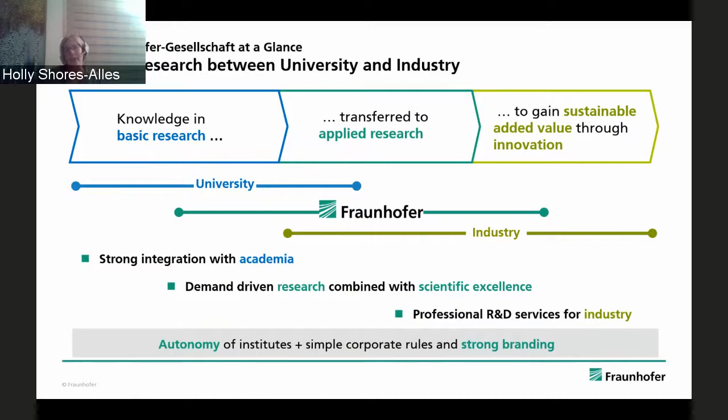Fraunhofer has a very unique role in this capacity. We have one hand in basic research and the other hand with industry, so we are the translator. We take what comes out of universities in their basic research, figure out how it can be turned into a marketable product or service, and find the appropriate customers who can commercialize this.

As a result, it's crucial for all of our institutes to have a very strong link to academia. For this reason, Fraunhofer has a mandatory model that the heads of the 76 Fraunhofer institutes are also university professors, or that they have a chair at a university. This serves both the Fraunhofer Institute and the university.

If we look at it from the Fraunhofer Institute director's point of view, they benefit from this because this association gives them access to basic research. They have access to all of the students and can recruit new scientists from the universities, as well as interns and undergrads, and they have opportunities for their employees to gain scientific qualifications.

Now, looking at it from the same person who is a chair of a university, their affiliation with Fraunhofer opens the door for them to have access to customers and industry-oriented projects. They can put this also into their curriculum, and they have access to all of the facilities that a Fraunhofer Institute has.

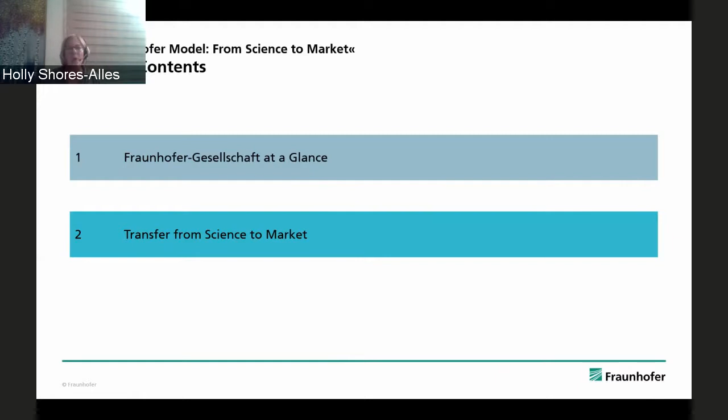All right, now I'd like to say a few words about how we transfer some of our work into the market. First of all, Fraunhofer has a number of impact goals. At the moment, we have 5 identified main goals. Number 1 is to have a secure and resilient society, meaning we want to help all aspects of society identify dangers and risks and be prepared for them. Affordable healthcare is also a focus, along with circular economy, a digitized value chain, and clean energy.

Now, based on these goals, we cluster the research that is done. We have 76 institutes, each very autonomous, each with their own unique R&D profile or portfolio, but they are clustered into the following research fields: bioeconomy, next generation computing, digital healthcare, AI, hydrogen, resource efficiency and climate technologies, and of course, quantum.

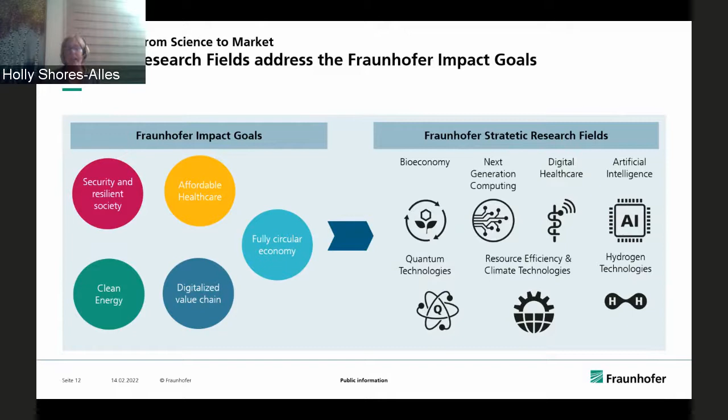Fraunhofer has identified certain ways we look at our own efficiency in terms of whether we're translating what we do into the market. We look at that through public revenues — these are figures from 2020, where we had roughly 900 million euros. Industrial revenues of roughly 658 million, international revenues of 276 million, a large portion of which is in Europe. We had 638 applications for patents. We had 26 spin-offs, and also transfer of human resources — I'd like to say a word about this.

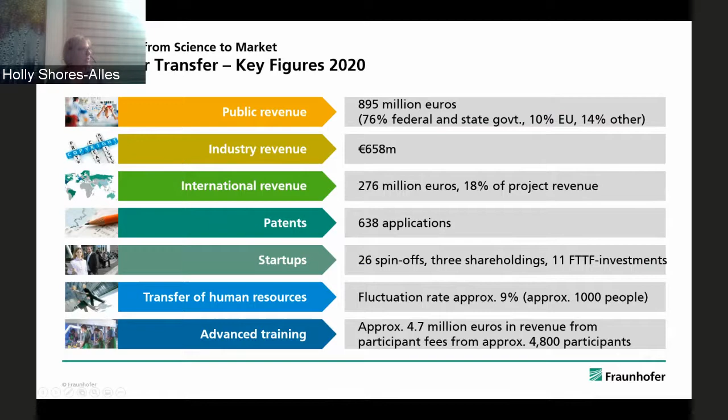That said, we also have a lot of contracts with big companies, meaning 250 to 10,000 employees. This makes up about 30% of our customers and 30% of our revenues, and also large corporations, which make up 20% of our customer base and 40% of our revenues. So we really cover the whole scope.

I thought it might be interesting to give you a very broad overview of some of the Fraunhofer technologies that have made a lot of headlines. Fraunhofer research is in so many products and technology and equipment that you get your hands on, but for obvious reasons it's not put on the product itself. We sell our services to the company that buys it. Some examples that would resonate with everyone: back in the 1990s, the MP3 technology was developed at our Fraunhofer Institute in Erlangen, IIS. And going up to today, we're very much involved in research areas like quantum, AI, and hydrogen technologies. So this is just a very broad overview.

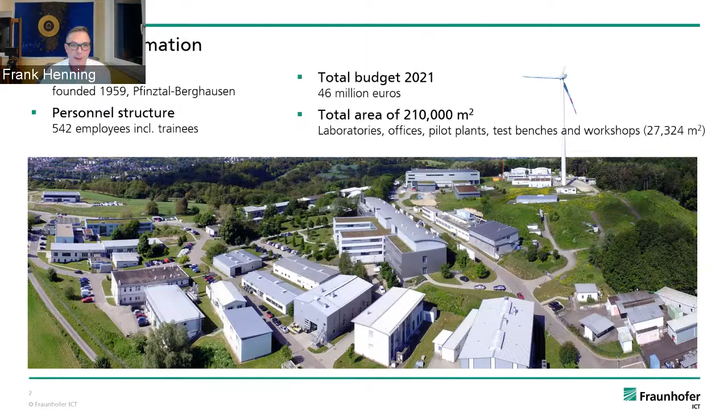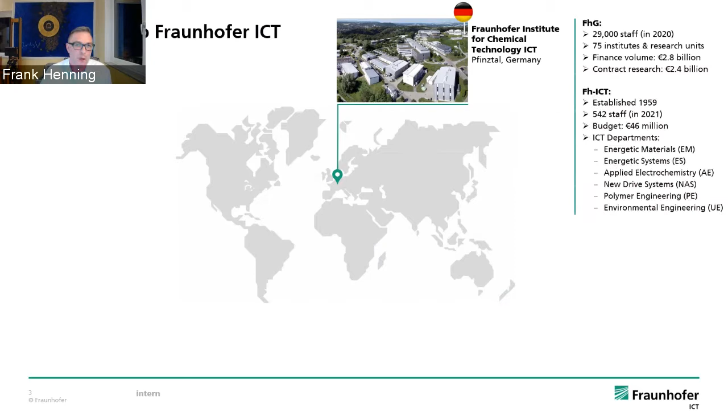Fraunhofer ICT has a large international presence. Our main presence is here in Germany, southwestern part. We have two partner universities we are working with: the University of Western Ontario, where I am an adjunct professor, heading and managing the Composite Research Center there at Western in London, Ontario.

A similar center is located in Ulsan, South Korea, at UNIST. Both centers bridge our activities into interesting markets, because automotive technologies are global, and if you want to introduce a new technology, it must fit into different markets. The automotive industry in North America is different from Europe and from Asia, where we have mega cities and different vehicle sizes. So it's interesting to work with local colleagues on how to apply these technologies and composite materials in individual markets, together with our teams and partners.

A new Fraunhofer innovation platform has been founded during the pandemic, together with the University of Ostrava in the Czech Republic, focusing on applied artificial intelligence for material development and manufacturing process development. That's in the first phase. Canada is in the third 5-year phase, and Korea has just started the second 5-year phase.

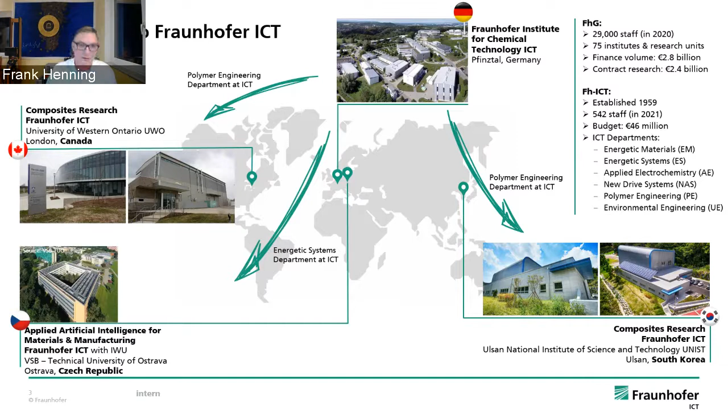Our core competencies are in explosive technology, safety and security -- that's the military and defense sector of Fraunhofer ICT. The other three are mainly dominated by civil research: polymer technology, chemical processes, and energy and drivetrain systems. There are a lot of synergies amongst these areas as well.

Today I want to point out some of the synergies between polymer technology and energy and drivetrain systems, because being in applied research, as engineers we like to have products developed in order to tailor-make our materials and processes accordingly. I guess that's a genetic thing for engineers. This gives us an excellent platform to work together.

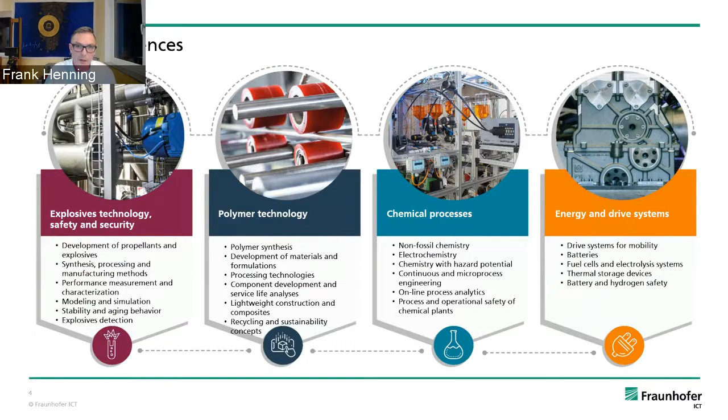Our main headline is sustainability, and I'll focus on a couple of topics we're looking into: sustainable energy solutions, lightweight technologies, which I will mainly talk about today, technologies for recycling and circular economies, and powertrain technologies for the future, especially for sustainable mobility applications.

Energy storage devices are becoming increasingly important as a result of the German energy transition. They can compensate for natural fluctuations in solar and wind energy, converting a renewable energy source into a predictable generating station with uninterrupted supply. They can also make a decisive contribution to grid stability and frequency control, and reduce the need to extend the grid.

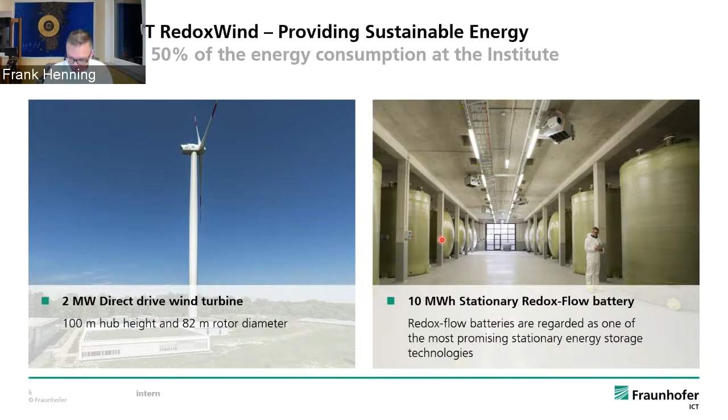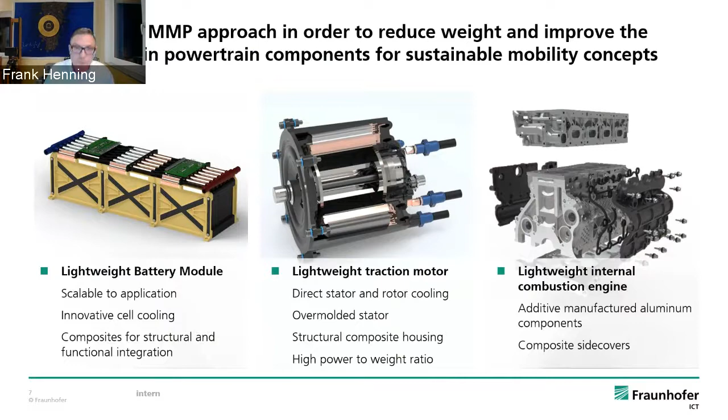Let's go one step back. When we talk about lightweighting, we talk about an intrinsic problem that exists, I would say, since the existence of any organic material, because any organic material strives for efficiency. Lightweighting, looking out into nature, gives us the best concepts and ideas when we talk about lightweight products, also called bionic technology or bionic design.

For us engineers, we always try to find a definition for that, what we are doing, and we came up with a definition as follows. Lightweight design is the holistic implementation of a development strategy aimed at realizing the required function under given technical, economical, ecological, and social constraints through a system of minimum mass while ensuring system reliability.

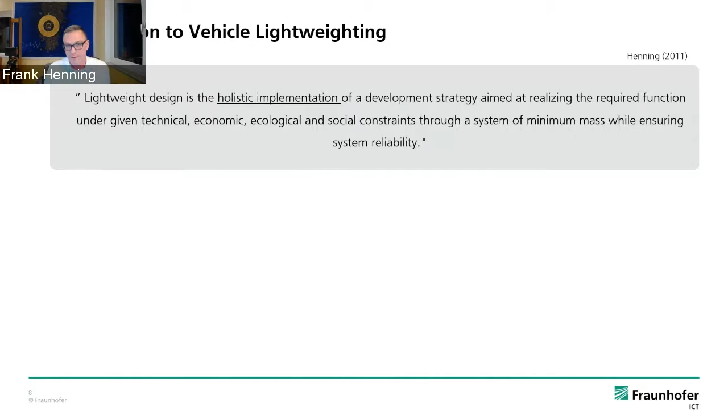So when you condense that to a very small sentence, I would say an engineer has to materialize a function, and in our case, sustainably, with a low weight and a low carbon footprint.

To do this successfully, it's a pretty interdisciplinary task where you have to look into methods, design methods, simulation methods. You have to understand materials, you have to understand processes. You have to think in systems. You always have to move the boundary conditions of your system to broaden the horizon, to get as conceptual in your approach as possible. You have to understand what type of materials you can play with and what type of processes are at hand, or developed, or need to be developed, in order to match the boundary conditions of productivity. And then you have the social and environmental developments that come into play without announcement, right?

So we know the discussions about plastics and the environmental impact of today. So lightweight design is a complex engineering product development task that must be based on an increasingly holistic approach if it is to be successful.

And this is not just about the materials, it's also about the joining innovations. Lightweighting without joining is a lot of trade-off in the end. So we have to consider the system.

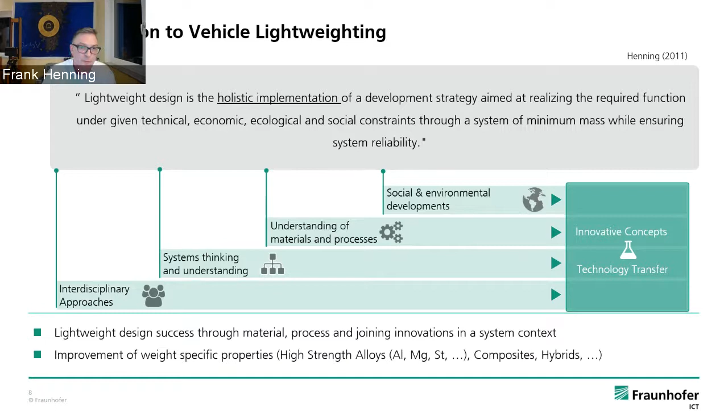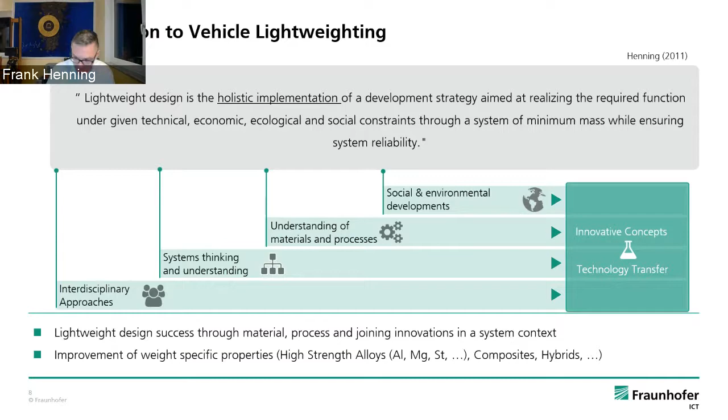We're always striving for the improvement of weight-specific properties, improving the materials, and coming up with new alloys, new fibers, new resins in order to match this competition. And in an industry called aviation, this has been very, very successful, being implemented in the past decades.

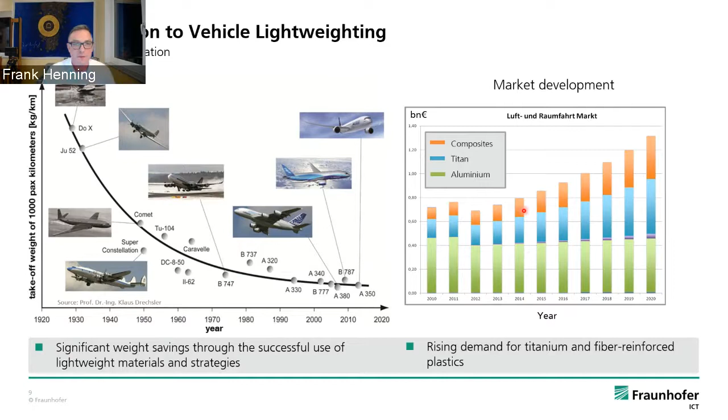Composites, carbon fiber composites, titanium, aluminum, everything we think it's fantastic if we could use that in automotive as well. But automotive is subject to a different field of tension.

In addition, of course, the airplane is most of the time in the air. The car, especially in pandemic, if I look into my car, it's most of the time in the parking lot or in the garage. So that determines the business case.

The owners of these vehicles are totally different, right? Here in automotive, we have high volume, high cost pressure, increasing safety and efficiency requirements, increasing quality and functional requirements, established technology standards, increasing individualization we have to meet. And then we have all of a sudden new kinds of car sharing concepts. We have e-mobility coming up, where we don't have combustion engines, where probably composites can play a different role.

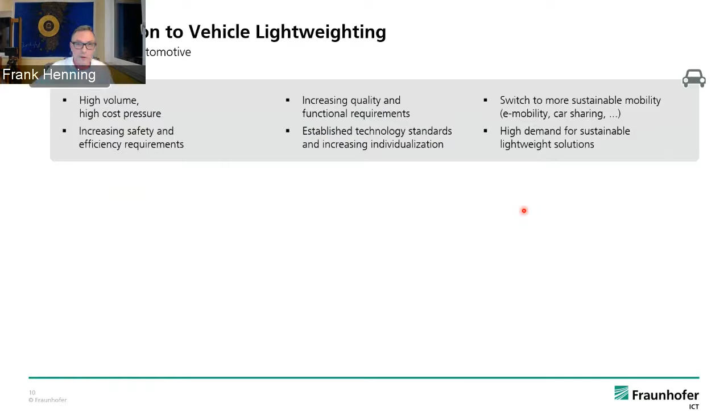We have a high demand for sustainable, lightweight solutions, and when we look into the last 50 years only, we see that the curve is looking completely opposite from aerospace. Our vehicles are getting heavier and heavier.

In all the curves we find in literature, just look at the gray one here, the internal combustion engine driven vehicles. Now coming into play the electric driven vehicles, we are adding battery packs, we are adding the engine. I'm not talking about hybrid vehicles because you have the two drivetrains plus the battery, so you're getting in the end in the same ranges. So it's really another weight jump. It's not a decrease of the weight, it's a significant increase of the weight which we have to deal with.

Cars are getting heavy. The electric-driven cars are getting really heavy, especially when we talk about SUVs. Sometimes you need a set of tires in just one year, just because of this incredible increased weight. Compared to the Golf 1, which I drove when I was a young guy getting my driver's license, we increased the weight of a similar ID3, a similar car today in battery-driven form, by 244%. And from the last generation, the Golf 8, it's still a 51% increase.

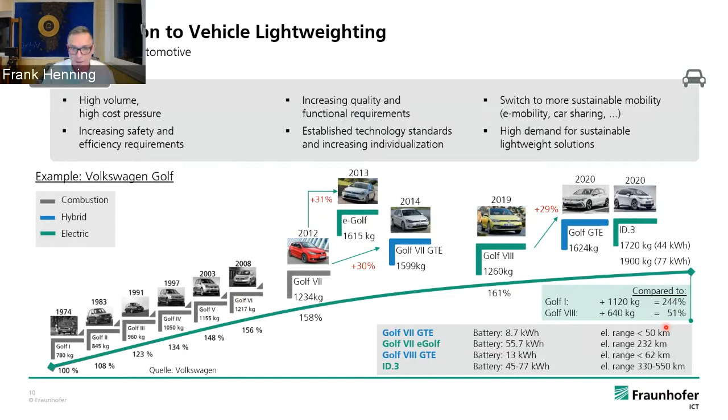So how can we turn around this spiral of weight increase into a weight decrease, and how can we take the momentum to further decrease the weight by adapting brake system, engine, clutch, etc., and the battery or electric engine, in order to take advantage of a lighter body in white structure?

The answer here is completely different to the field of aerospace, because we have a different boundary condition. Airplanes are designed for stiffness. Cars are being designed for stiffness in crash. You better not be crashing with an airplane, but the probability of crashing with a vehicle is much higher.

So we have repair strategies. We have to take into consideration, even more important, platform strategies. We have partition lines in the system of designing such a body in white, because some parts of the system have to be utilized for other vehicle models, for example.

I think the different approach here is that multi-material design is the way to go, and this multi-material design is not easy to answer, because it gives a different answer to a luxury segment, to a sportive segment, to a mass-produced vehicle, to a platform segment, etc. And it's our job as engineers to figure out what is the most ecologic, economic, and technically viable way to come up with an engineered solution.

It's not a salvation to just come with new materials, because we have a lot of challenges, right? We have complex joining, we have the delta alpha problem in terms of thermal expansion, we have complex simulation methods to meet the requirements. And we have to deal with the material separation of the life cycle, because we want to generate circularity in the materials we are using. So with the big advantages, there are quite some challenges we have to cope with.

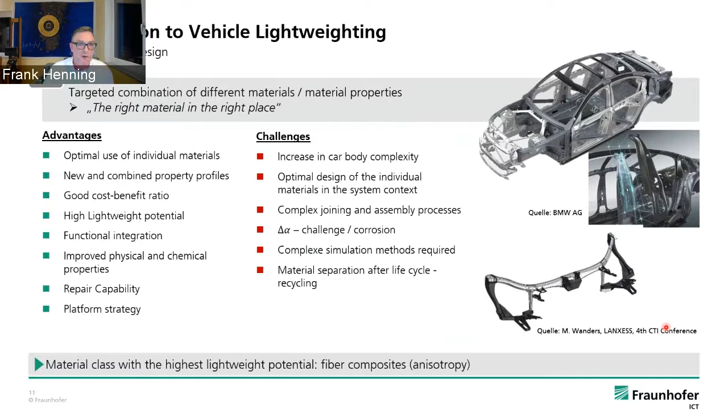I'm focusing today on the material class with the highest lightweight potential, the fiber composites. They show anisotropy, and anisotropy is something beautiful for us as engineers because it can also be designed already on a material level and not just on the product level. So we have one more degree of freedom to be efficient in weight reduction, which is to be exploited and to be feasibly processed in large-scale processes.

Completely different field from aerospace. Why do we think it's important to look not just on circularity and recycling? Because recycling is just 0.1% of the vehicle CO2 emissions over the life cycle. 85% on average, according to this study, of the CO2 emission is from the use phase. So the lighter we are in the use phase, the less CO2 we emit. And yes, we have to think about recycling, but we have to do it in a responsible way, not just looking into the recyclability of materials and making decisions based on this.

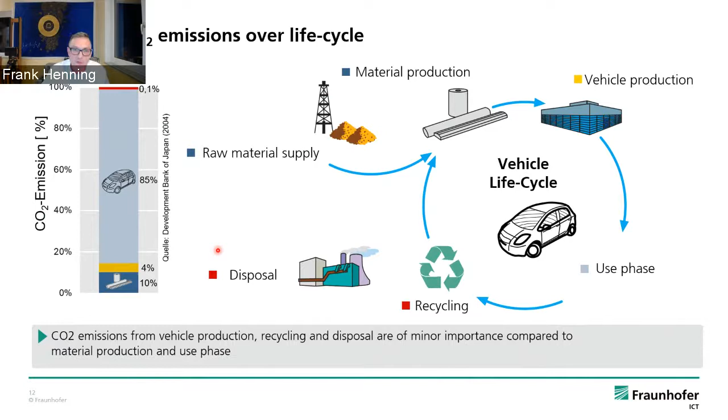Let's quickly dive into the world of composites, it's quite challenging in that short period of time, so let me guide you through this slide. My world of composites is divided into two worlds: one is the continuous fiber reinforced polymers, and the other is the discontinuous fiber reinforced polymers. Those are capable of being draped, those are capable of being flowed—complex shapes, simple shapes, and as hybrids, beautiful materials to combine in order to integrate functions and provide structural performance at the same time.

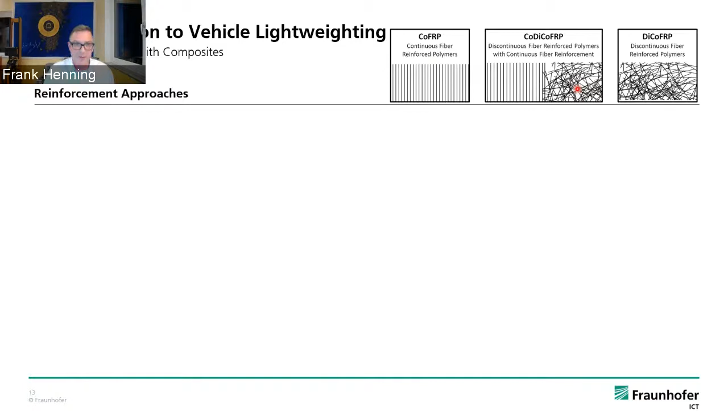There are many more derivatives of these processes, but they are more hand layup and small series production. I was focusing here on large series production.

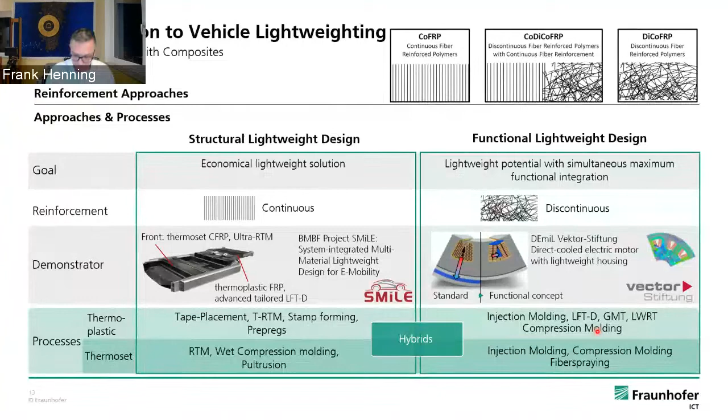So that's more functional and more complex in shape, and that's why we prefer discontinuous material, which is not of that structural performance, but more on the functional performance. You see here as well the adequate manufacturing processes, which I don't want to point out in detail because of time. Just two examples that we developed together with our MMP approach, and therefore I want to quickly introduce the MMP approach prior to those slides.

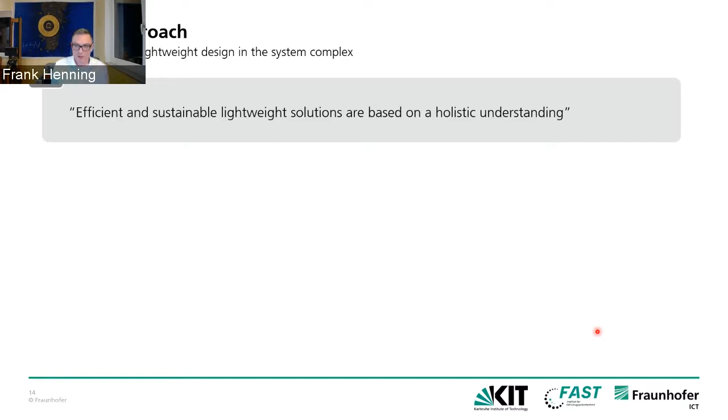The lightweight design requires not only industry specific, but also product related solutions. So when we look at this holistic approach of getting to the core here, the white box, the lightweight solution, we engineers tend to look at the technical challenge, which is in blue. Then we have the people that look into the economic point of view, that is costs and efficiency, and how they can provide quality to their customers. And then we have the green box, which is the columns for sustainability and life cycle analysis, ecological boundary conditions, and societal boundary conditions.

And I'll give you one example. When we talk about airplanes, we have a completely different cycle time, a completely different size of our product, and a completely different cost structure, because we are returning our investment much faster—we have a higher loading capacity, more passengers that pay their expensive tickets, and it's always in the air.

So for these few parts a year, we do quality assurance by part. In automotive, that's unaffordable. So in automotive, quality assurance is in the processes—the processes are the expensive part, and the material needs to be as cheap as possible because that's the volume that runs through. In aerospace, it's exactly the other way around.

And it's also very different to the energy field when we talk about windmills. Never let an engineer responsible for aviation design a windmill and vice versa, because either it will be unaffordable or it will be totally over-engineered. That's why we need to understand these individual markets to get to an appropriate lightweight solution.

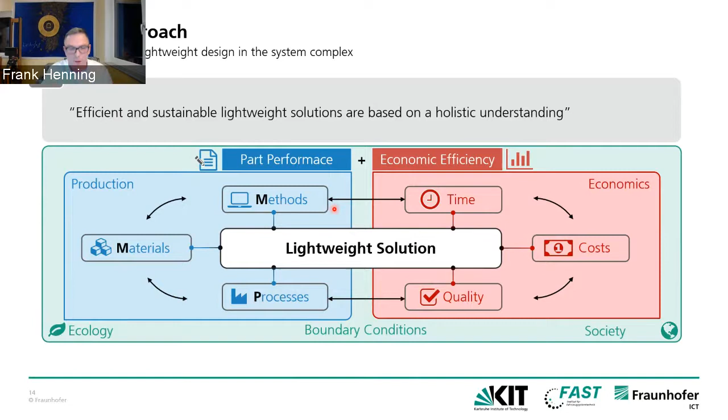By using these boundary conditions to figure out which materials and processes are suitable, we have to develop the methods, and that's what we did with the CAX chain. I will show you in a second, to accompany this optimization process, to narrow the path down to the optimum design for the materials of choice.

How does that look like? We are working at Fraunhofer ICT together with our partner KIT, as Holly mentioned. So we have a house of competence that we developed over the past 15 years. All the methods—the virtual process chain, the process simulation, the structure simulation, the optimization, and the AI—are being developed with my team at the university side. That's more the basic research on the methods.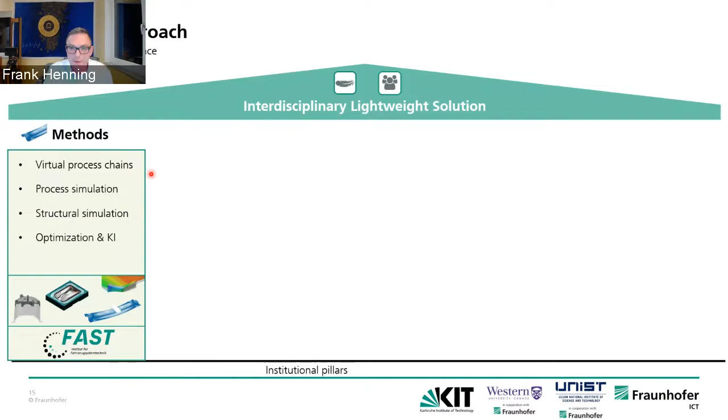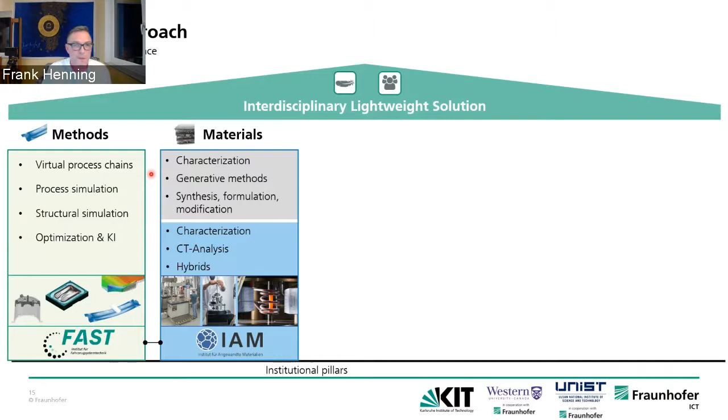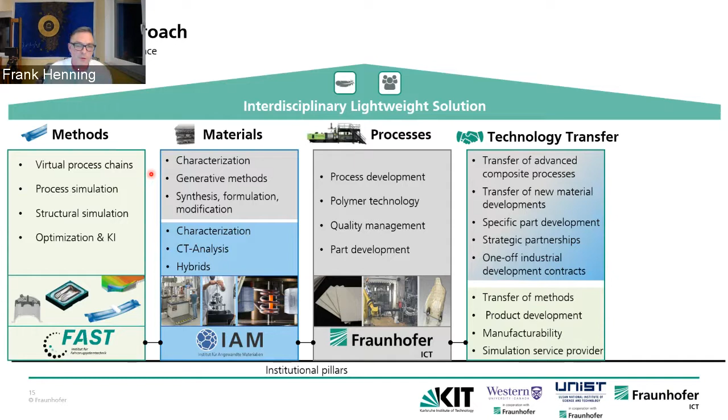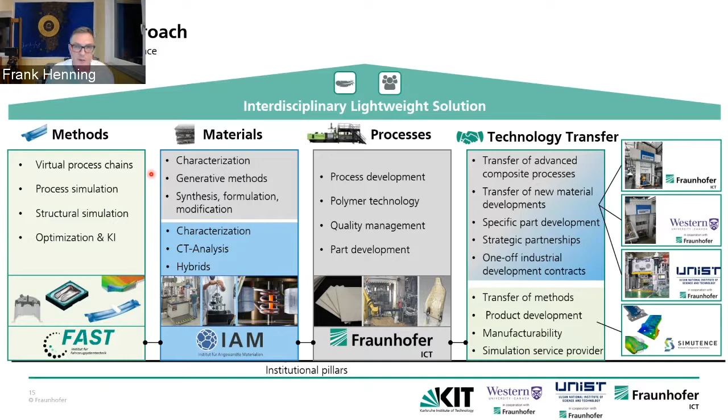And then we have the material characterization, which is partly done at the Institute for Applied Materials at the university, where we do the parameterization of our models and characterize our materials. The process development is done at Fraunhofer, and then obviously we need to disseminate, and that's how we work hand in hand with our partners in our innovation platforms overseas—through strategic partnerships, industrial projects, strategic collaborations, one-off industrial development contracts, and also through our spin-outs, like Simutence, for example, that offers these simulation optimization services on the market to industry today, including the latest methods.

Two examples utilizing the methods, materials and processes. Here you see the subfloor of that Golf kind of vehicle. That was a project we had with Audi and Volkswagen and a lot of industrial partners along the value chain, where we focused on a car without any steel so that we avoid electrophoretic painting.

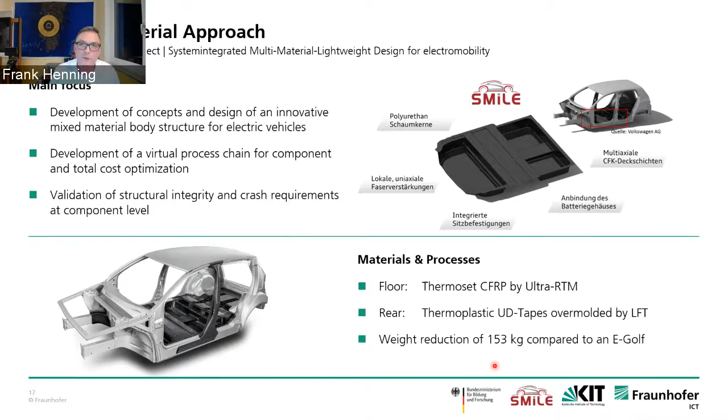So that's aluminum, magnesium, and carbon fiber composites and glass fiber reinforced composites. I want to look into the floor: thermoset carbon fiber reinforced floor manufactured with pressure controlled RTM, and the rear thermoplastic UD tape overmolded by LFT type of floor, molded with tape forming and compression molding. The whole vehicle body in white achieved a weight reduction against its competitor, an e-Golf, of 153 kilograms, which is quite a number in that body in white segment.

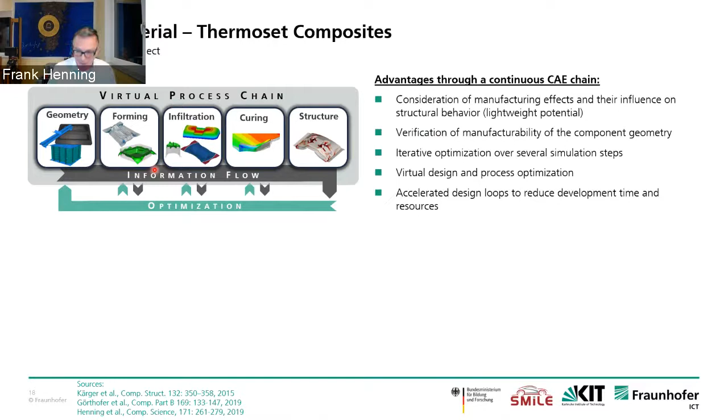The key development was the virtual process chain development, where we developed codes and algorithms to more accurately predict the material - simply put, how the manufacturing influences the material. We iterate the geometry, fiber orientation, and textiles through several simulation steps, do a kind of virtual design and process optimization, and by doing this accelerate the design loop to reduce development time and save resources. The upper part of that slide stays constant; the lower part is what I want to highlight quickly here.

The mold filling is displayed here in the video. What you see is a complex preform that has been assembled with local sandwich structures incorporated, a simulation that takes into consideration the two-phase air and resin. It takes into consideration fiber draping, fiber volume content, and fiber orientation, and therefore we can optimize the injection point. We can prevent air entrapments and dry spots - you see here a shot that hasn't been finalized.

And we can validate our simulation tools by doing so. You see here underneath the publications where you can find that in Composite Part A, B, or Composite Structures, some of the results. For these very fast curing resins that we need in automotive to meet the cycle times, we need to modify viscosity measurements to measure that viscosity behavior under short time, because with standard measurement devices we can't get this information extracted. And then we can do predictions, warpage simulation, etc., by a chemomechanical simulation.

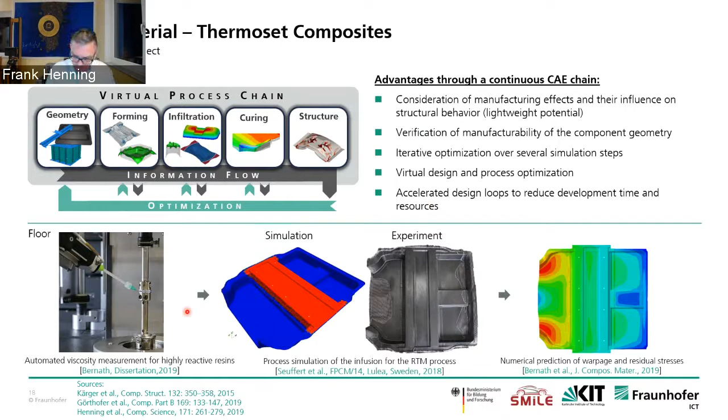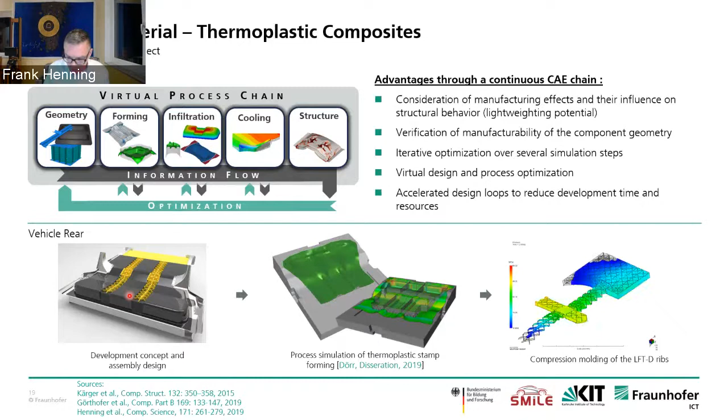Just the two examples - so we need the methods, we need the material development according to the prediction of the methods, and we need to do the process adjustments. And just if that's considered holistically, we can get to competitive solutions, or affordable solutions, let's say.

Running out of time, so I just want to quickly look into the sustainability aspect as well. We try to accompany our developments more and more with life cycle assessment, from the raw material, the production, the use, to the end of life. A couple of studies have shown that depending on the boundary conditions, the utilization phase has the most influence on CO2 emissions of the whole life cycle, and therefore lightweighting is an intrinsic challenge which we need to provide solutions for.

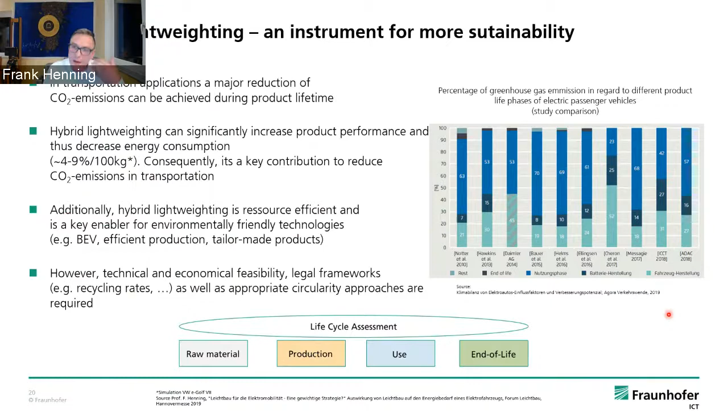So hybrid lightweighting can significantly increase product performance and thus decrease energy consumption. Consequently, it's a key contribution to CO2 emission reduction. So we need to find materials and processes that serve not only to reduce weight but also to improve circularity.

Fraunhofer has formed a network to look into this more intensively. What does it mean? We want to close the loop - we want to take back the parts after the use phase, after dismantling, which is a law in Europe that car manufacturers have to take the cars back and dismantle them. We have to make sure that the material is sorted, cleaned, collected, and reworked, and then either mechanical or chemical recycling, which is to be preferred before we look into downcycling or recycling in general.

And that's what we definitely need to avoid, littering or disposing. So a lot of the research focus at our institute is going into reuse and recycling technologies.

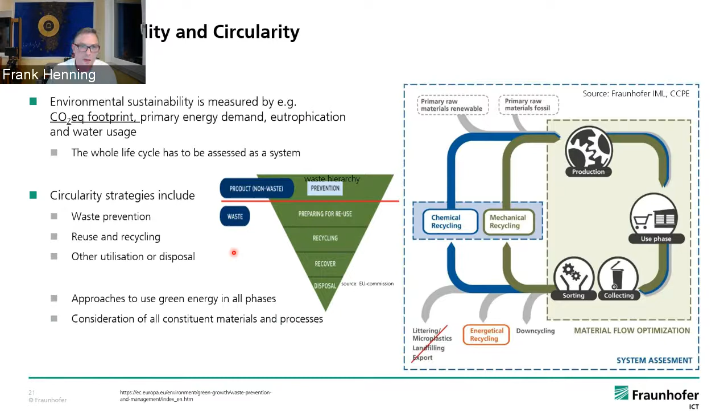Just to conclude that, I wanted to show you three examples. One is a leaf spring that we recycled, where we used highly filled glass fiber reinforced thermoplastics, with in situ polymerized ring opening polymerization to polyamide 6, from epsilon caprolactam to polyamide 6 in thermoplastic RTM, where we did mechanical recycling.

And with the electric engine housing, which is a thermoset material, where the housing encapsulates electronics, we need to do thermal recycling. So we do a material separation and recovery, and then a matrix pyrolysis.

Last but not least, a very interesting study in the aviation sector, a project called Green Sky, where we did a hybrid seating structure. Fraunhofer and its partners developed an innovative composite-based seating concept for civil aircrafts, incorporating multi-material design, a high level of functional integration, as well as novel material systems and process development. The final demonstrator is a hybrid seat structure, which does not surpass a maximum weight of 10 kilograms, which is easy to dismantle and owns a high recyclability, at least 90% of the seat weight.

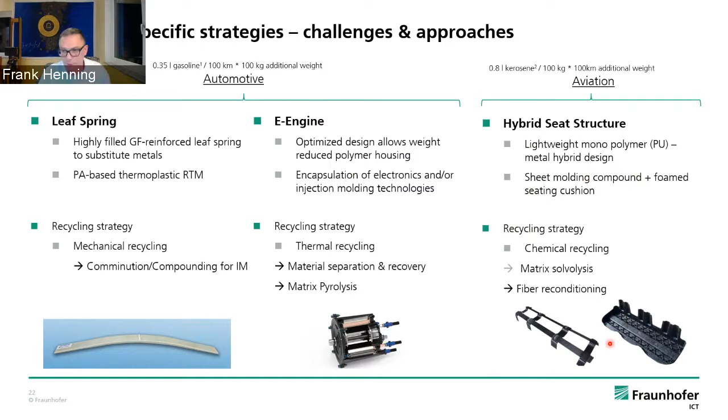In order to achieve this high recyclability, both production processes for the cushion, for the primary structure, and the shell structure are using polyurethane, flame and smoke retardant, as their respective resin material, which is an excellent material for chemical recycling.

When we look into the LCA of these aircraft seat structures in an airplane, over 8 years of lifetime, including manufacturing, use, and end of life, we are very conservative, like 5% weight savings only, because we haven't optimized the shape. It's like black metal molding. If we would do that, we could get our predictions even further down in weight, 25% in total. But that calculation has been made basically based on the 5% weight saving.

So the environmental footprint of carbon fiber structures for manufacturing and end of life is more than 2 times higher. Basically, the calculation is as follows: when we have an average of 167 seats in each airplane, flying typically an average of 2 million kilometers per year, the break even is reached after a few months, at 313,000 kilometers of flight distance already.

So it's very important that we are not doing a design for recycling only, but a design for sustainability. Otherwise, you would mistakenly choose aluminum, like a lot of the solutions are choosing because of better recyclability. But that's just part of the equation.

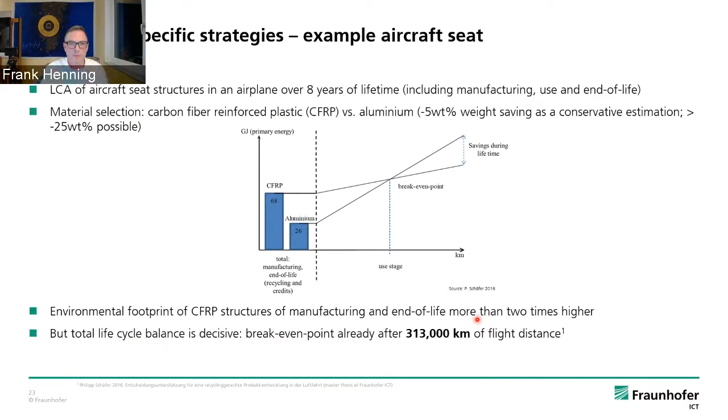In order to point that out more comprehensively, because it's also complicated and parameter rich, we have to think about how we can computer-aid a kind of computer-aided eco-balancing, not just a structural prediction or a manufacturability prediction, but also an eco-balancing to evaluate how much material is lost, how efficient the process is, how much material is being wasted or must be recycled, etc. Just to give a quick outline.

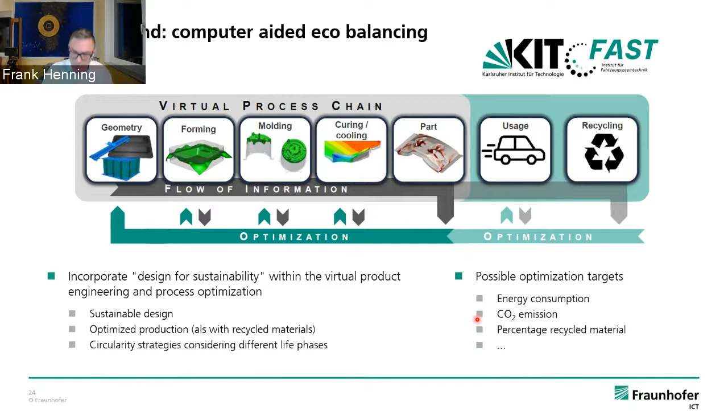I guess time is almost over, so let me jump through the next 2 slides just for information. They are added in the slide deck. Fraunhofer formed a cluster of excellence called Circular Plastics Economy, where together with 4 other colleagues of mine, all directors of other Fraunhofer institutes, we contribute in a holistic way to the circularity of plastics, from polymers to additives and compounds to recycling technologies, which I'm responsible for, the circular logistics and sustainability application and demonstration, and business and transformation models.

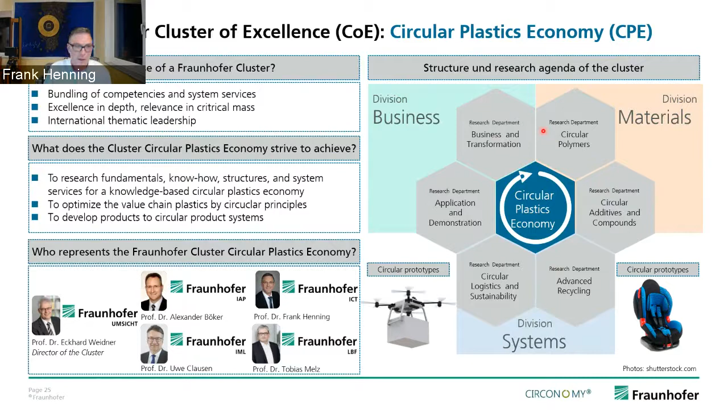I don't want to go too much into that detail, but there's circular economy assessment. We are looking into biodegradable polymers, additive second life, secondary raw materials, track and trace of these polymers, product design studies, not for composites yet unfortunately, but that's on the agenda for the future.

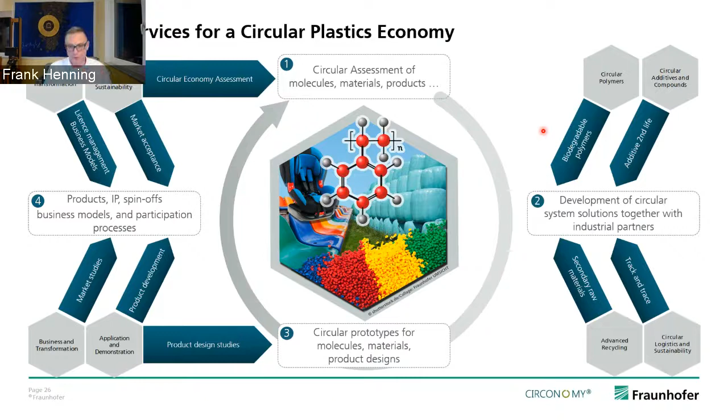So with this, let me summarize what I wanted to convey in this very short time, having the opportunity to speak at your event. I think lightweight solutions were always maybe not that hyped. It has been hyped in the past 10 years, but I don't like hypes because they over-focus on a topic, and we need more consistent time and effort to improve.

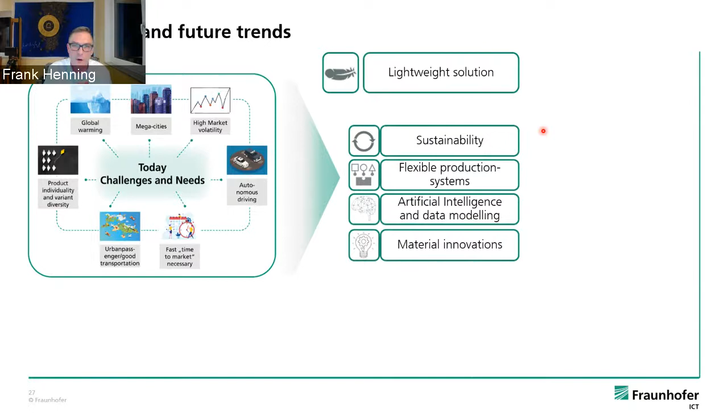That's what nature does for millions of years in lightweighting. So I think it will be a topic forever for engineering. It's something we have to improve in all generations of products, with a focus now and in future on sustainability, maybe more flexible production systems to bring costs down, and more artificial intelligence and data modeling supported processing, reinforced learning, other stuff that can be applied here to be more efficient, and obviously ongoing material innovations based on natural and natural-based materials.

Fraunhofer is just as strong as their partners are, as Holly already said in the beginning. So we are grateful, and I just picked a few names of universities and partners we're working with from industry and academia. But like all of us, we are highly depending on our sponsors, a diversity of federal, provincial, European, and international funding that helps us drive this innovation forward. Thank you for your attention, and I'm open for questions.

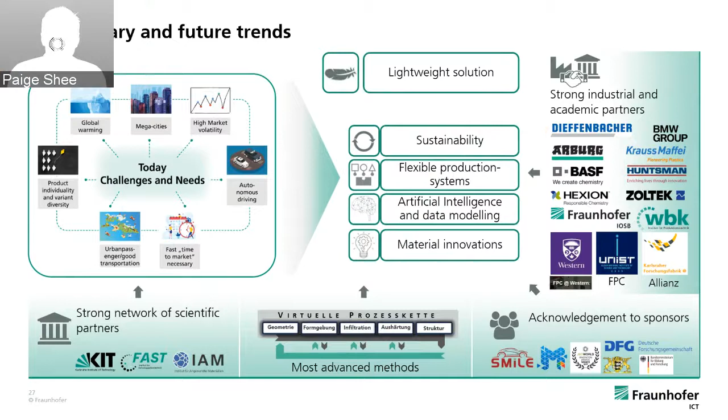Thank you so much, Frank and Holly. Holly, thank you for the wonderful overview of the Fraunhofer-Gesellschaft institutes overall. Frank, thank you for a closer look at one of those institutes, the Institute for Chemical Technology, ICT, and more specifically the work you're doing in vehicle lightweighting and composite technologies. Thank you for the great summary. You've already contributed a lot to the field, and it sounds like this field is very ripe for further research for many years to come.

We are short on time, so I will jump right to the questions. Looks like we have several that have been submitted through the Q&A panel. A question for Holly: if a U.S. student was interested in working for Fraunhofer after graduation with a BS, MS, or PhD degree, what would you recommend as their initial steps?

Well, first of all, thank you. We are always looking for more researchers, so please reach out to us. My first step would be to identify the institute that would be most relevant to your professional profile and contact them directly. They always have a human resource contact on their website, so just reach out.

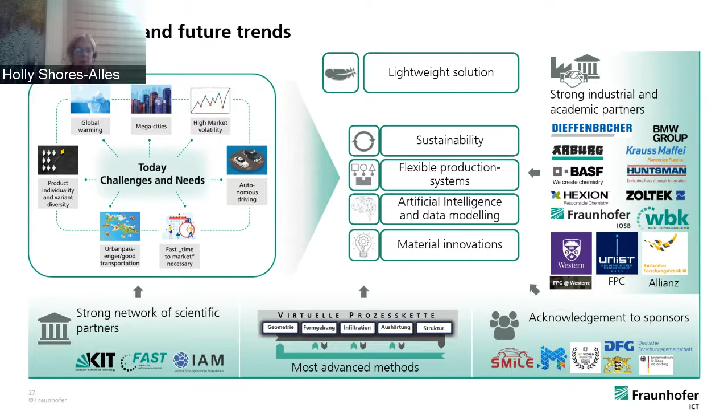Thank you. We also have an individual at Georgia Tech, David Citrin, who has expressed interest in, I think, maybe meeting with you one-on-one. I can share his information with you after the conversation today. His work is on NDE of GFRP and CFRP using terahertz imaging. He has a lab at a campus in Metz, France, which is, I guess, maybe not too far away. So I'm happy to facilitate that introduction after our presentation today.

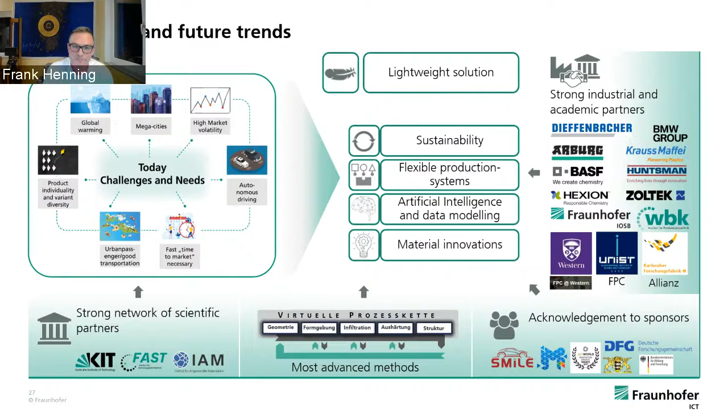Thank you for that. Yes, we'll follow up via email. I see we are at the end of the hour, and I wanted to let our audience members know that if you're interested in rewatching any portions of this broadcast, or if you'd like to invite fellow students or colleagues who were unable to attend live today, we will be posting a recording of this session on the Georgia Tech Manufacturing Institute website. If you go to the tab for past events, you'll find recordings there, and this one will be posted within the next couple days. I also want to invite our audience members to join us next Monday at noon, where the topic will be emerging workforce development programs at BioMADE. It's an interesting follow-up to today's lecture, because BioMADE is one of the newest Manufacturing USA institutes to launch, built on a similar model to the Fraunhofer Institutes we heard about today.